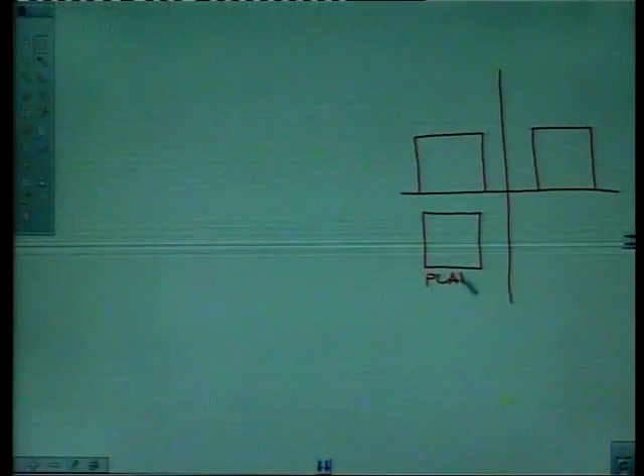First of all, we will draw orthographic of cube. Orthographic means plan, front elevation and side elevation. Before starting isometric, students must be familiar with what is plan. This is plan. This is elevation. And this is side elevation.

Okay. I am not going into detail. You must be aware of what is plan, what is front elevation and what is side elevation. So to draw isometrics, we must have at least plan, front elevation, or for complicated objects we must have a side elevation. So the isometric of the cube will be drawn like this. First of all, draw a straight line with parallel bar. This is horizontal line.

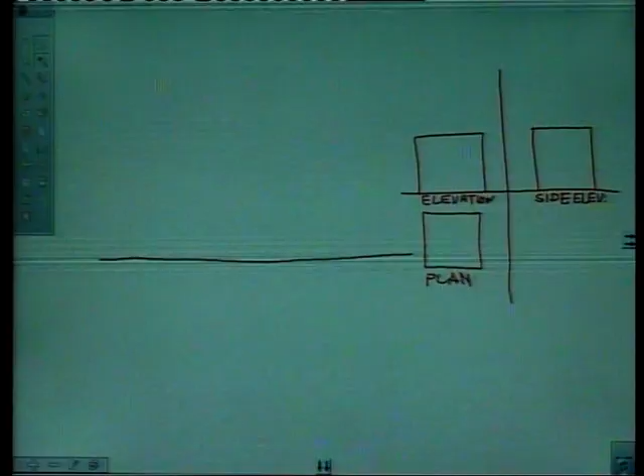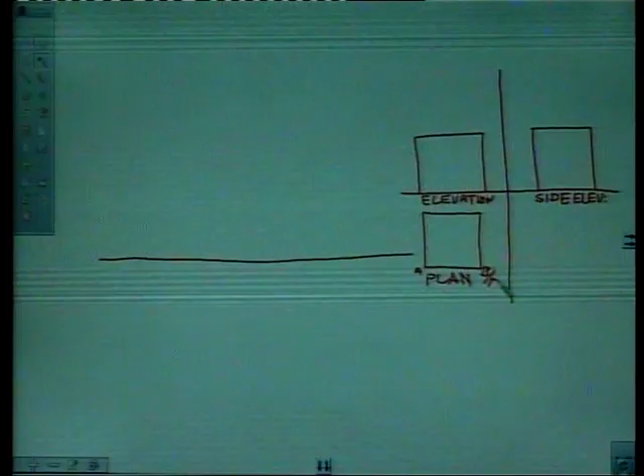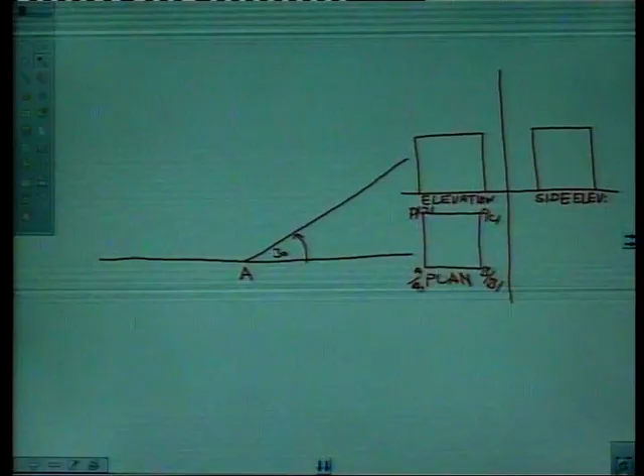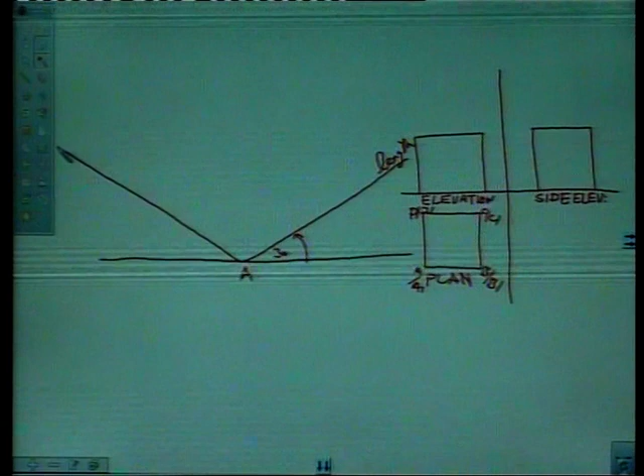Right? We will mark the points in the plan also, say A, B, C and D. Say we will start from point A, mark here point A. Right? Then draw a line at 30 degree like this. This angle is 30 degree for isometrics, and this line may be representing, say, length of object. Draw another line here. This is again 30 degree. This may represent breadth.

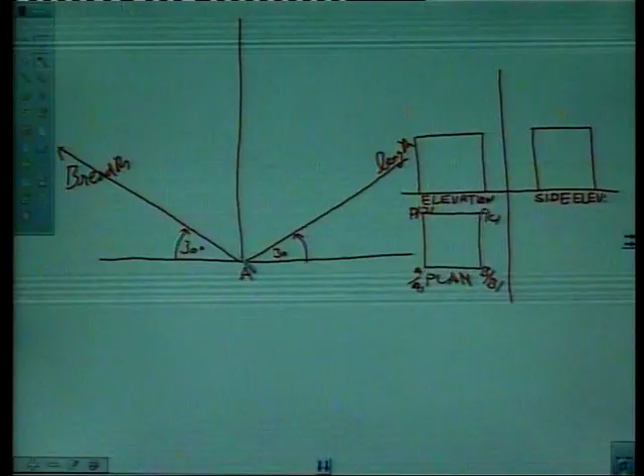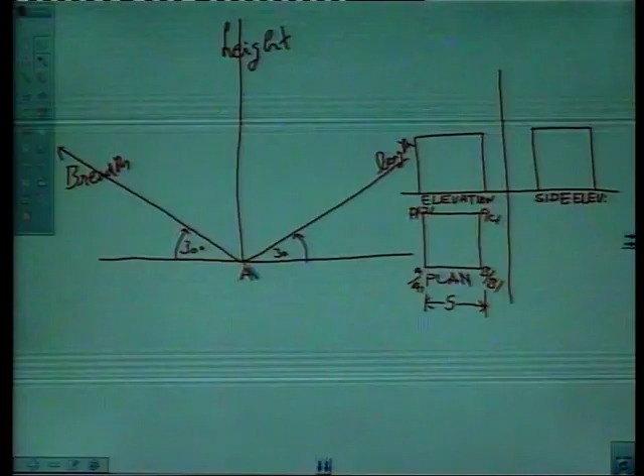Breadth of object, and draw a line perpendicular at point A like this. This may represent height of object. Right? So if we want to draw the isometric of a cube, say size of the cube is 5 centimeter. All sides are of 5 centimeter. So we will take from here and mark 5 centimeters, say 5 centimeters comes to here. This line represents length of the cube, which is 5. So mark a point here, A to B, and this distance is 5 centimeter.

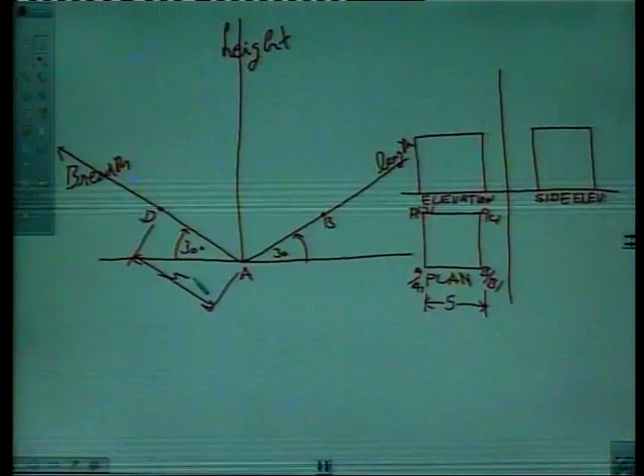Breadth of the cube will be again 5 centimeters, say from A to D. Mark breadth on breadth line. So this is again A to D, again 5 centimeter. Right. Similarly, height of the cube is also 5 centimeter. Say this is also 5 centimeter. Right. So mark height here. Right. Now we have length of the cube, breadth of the cube, and height of the cube, all marked on length, breadth and height lines.

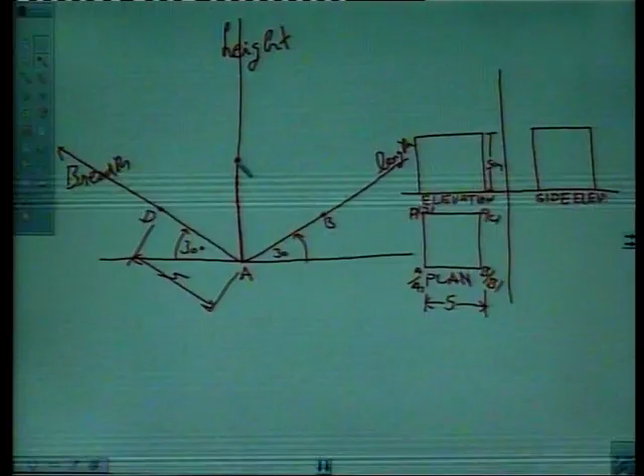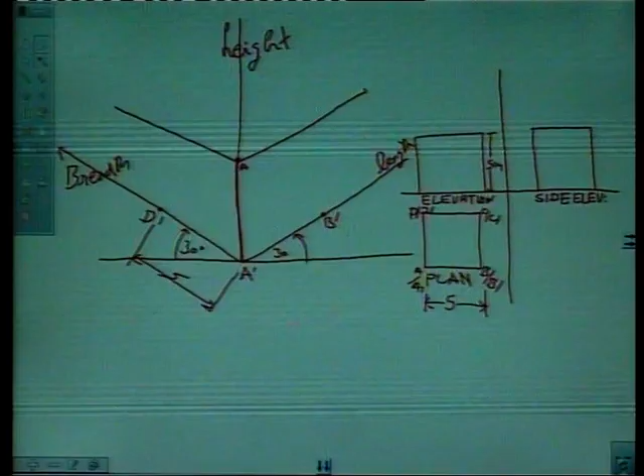Now how to complete the drawing? Okay, draw a line parallel to line AB from this point like this. This AB and this line are parallel. Similarly, draw a line like this, which is again parallel to AD line, right? So this height basically gives point A, and say lower point is A dash, so we'll write A dash, B dash and D dash. Now here we have A and A dash. From B, draw a line like this, straight. This line is basically perpendicular to this line. This B dash is perpendicular line, right?

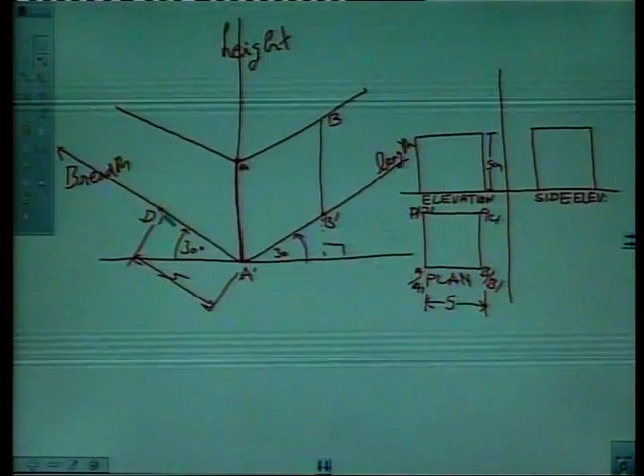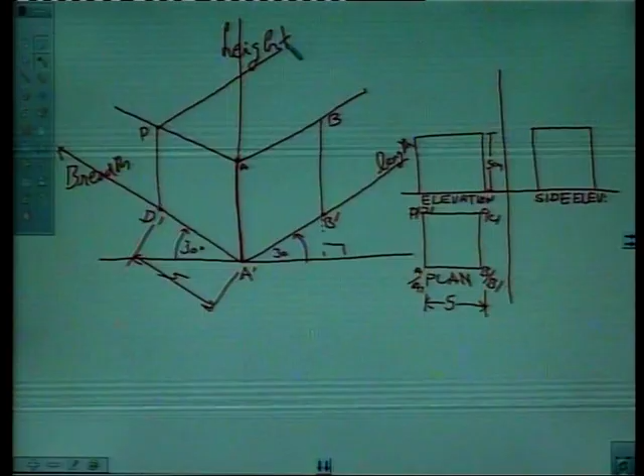From D also draw perpendicular or take a line straight vertically up. This will give us D, right? For locating point C, we will again draw a line parallel to AB like this, and draw a line parallel to line AD from point B like this. So we'll here get point C. So in this way we simply complete isometric drawing of a cube. We can draft this with dark pencil. Right. Object lines should be the darkest lines. So this way we get isometric drawing of a cube.

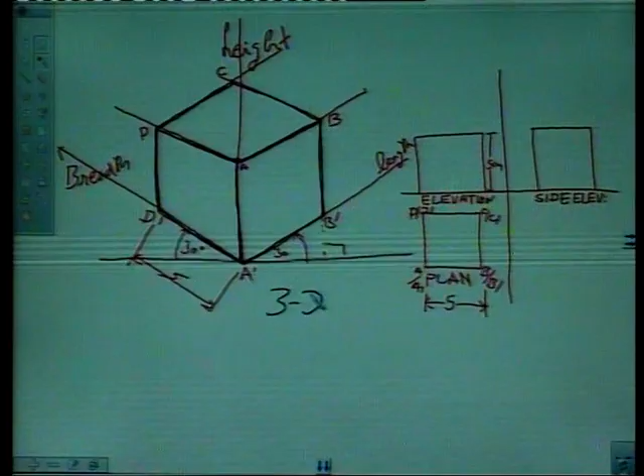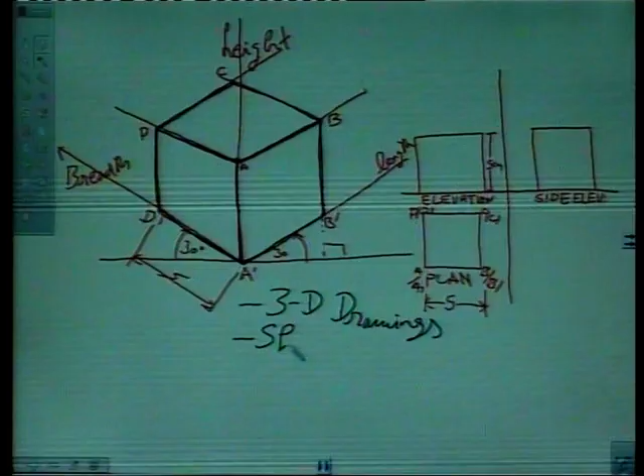So from this we can observe what are isometric drawings. Isometric drawings are basically 3D drawings. We can say these are 3D drawings. Next, this drawing shows us some components of the length of the object, some components of breadth of the object, and some components of height of objects. Shows components of length, breadth and height, right?

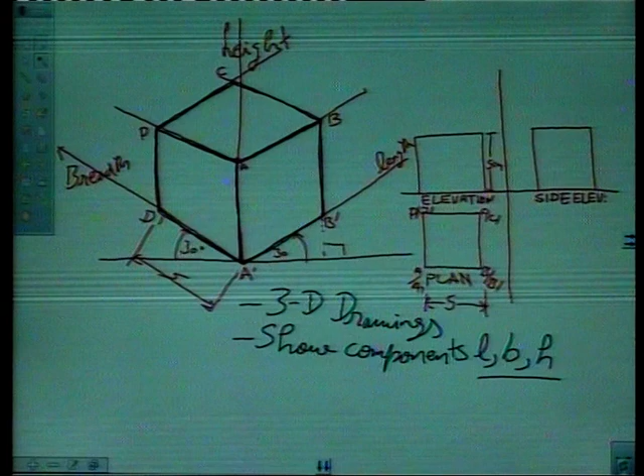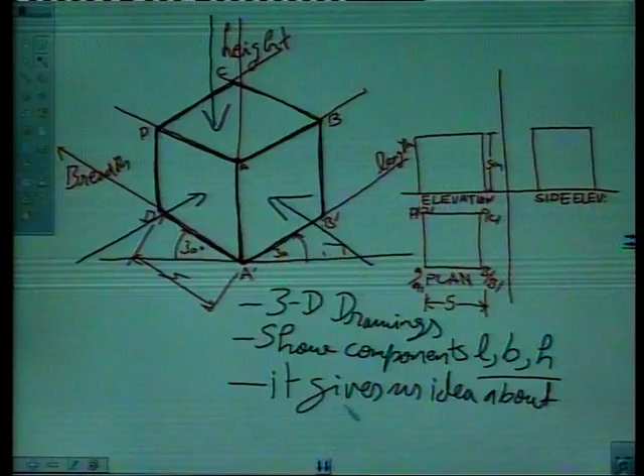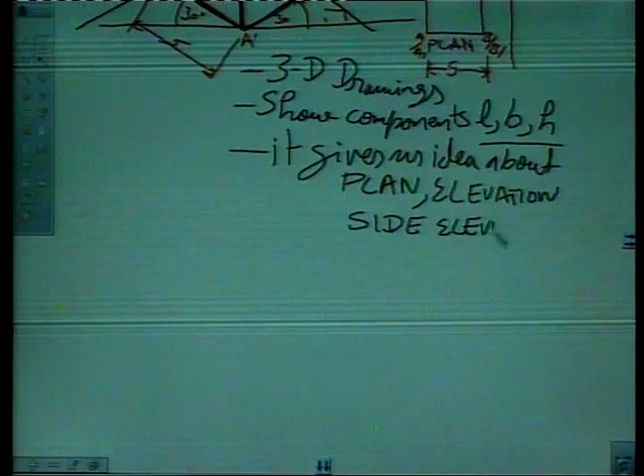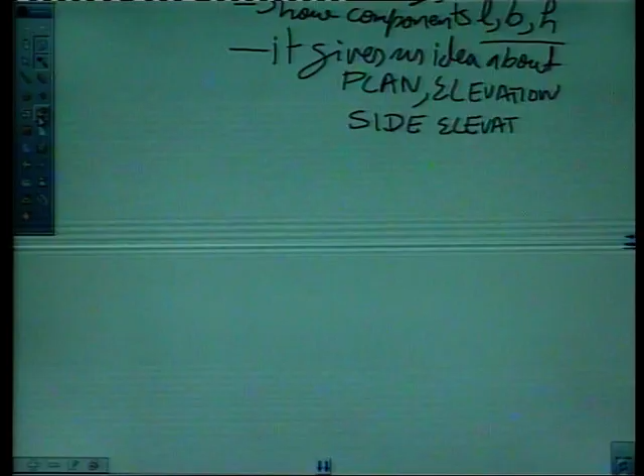Third, this isometric drawing gives us, say this is part of front elevation, this arrow represents front elevation, this arrow represents here idea of side elevation, and this arrow represents idea of a plan. So we can learn about plan, elevation and side elevation of the object. It gives us idea about front elevation, side elevation and plan of the object. All right.

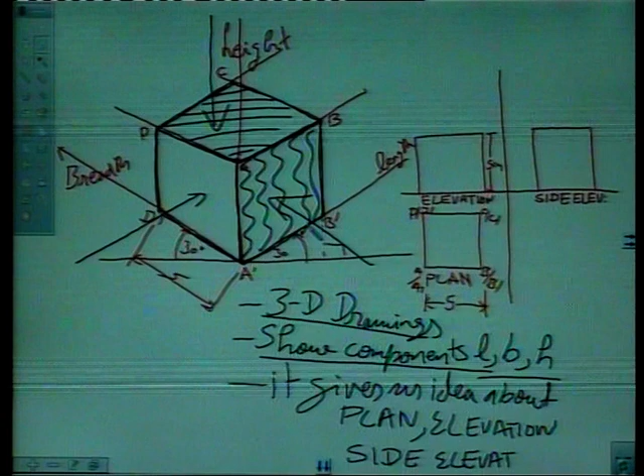So isometric drawings are basically 3D drawings. It shows some components of length, breadth and height. Right, this way we are seeing length, this way we are seeing breadth and height. It gives us idea about plan. This surface gives us some idea about the plan, right? And elevation, this here is elevation part, and side elevation, this arrow from this side represents side elevation.

So the students of architecture should be able to draw isometrics from these orthographic projections, or they should also be able to draw orthographic drawings from the given isometrics, right? There are some more things, like all lines which are parallel, like this AB and DC are parallel. In isometric also these lines are parallel. Say this is AB and this is DC.

This and this. We also observe in isometric that parallel lines remain parallel. This is also important. All parallel lines remain parallel. Like AB is parallel to DC here. This is parallel, right? And BC is parallel to AD. This BC is parallel to AD, right? All parallel lines remain parallel.

Next, all perpendicular lines remain perpendicular, like this AA dash. In actual, A and A dash is perpendicular. So this line is perpendicular here, right? And BB dash is also a perpendicular line. BB dash is also making a 90-degree angle with the ground. That means this is also at 90 degrees to ground. And DD dash is also at 90 degrees to ground.

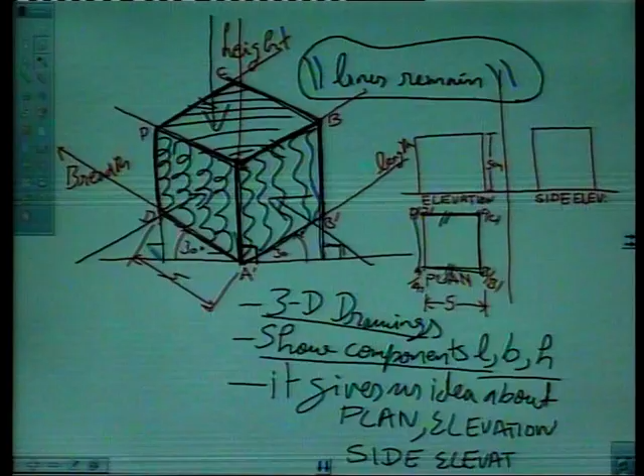That means all perpendicular lines remain perpendicular to the ground, and they can be drawn using parallel bar and set squares. We can keep our parallel bar here like this and set square like this. So this line is drawn by the vertical edge of the set square.

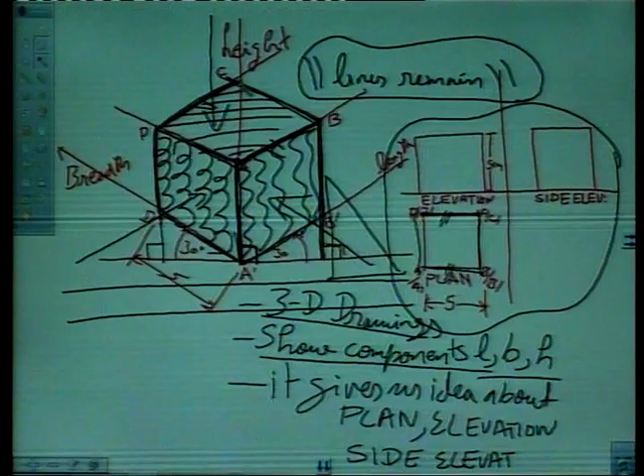So this gives us a brief introduction about isometrics. What are isometrics? These are actually 3D drawings and very easy to understand by a layman. A layman can't understand this drawing. This is an orthographic drawing. Only technical persons like engineers and architects can understand this, right? And this can be understood by everybody. Everybody can say that this is a cube, right?

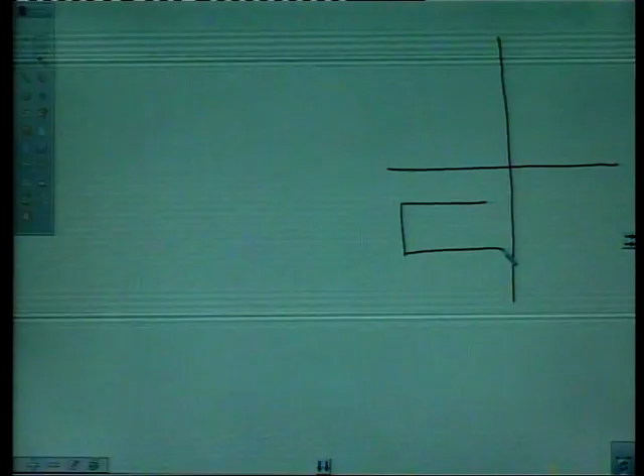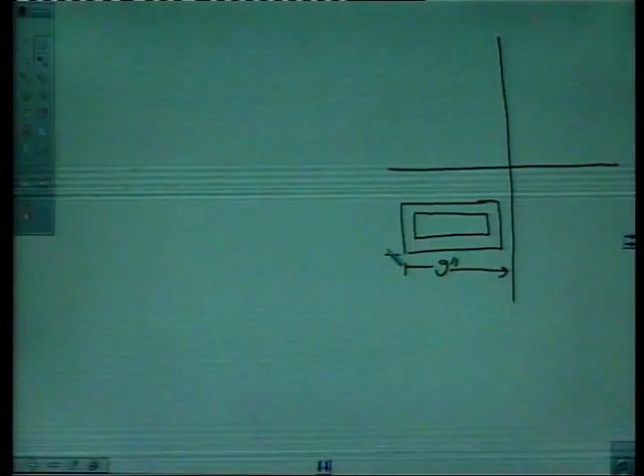Now let's take one more example, very familiar. Say we want to draw the isometric of a brick. For drawing the isometric of a brick, first we should know the orthographic of the brick, or plan, elevation and side elevation of the brick, which I will draw very quickly. Say this is the plan of a standard brick. Say this line represents the frog. Say this is 9 inches. Say this is 4.5 inches.

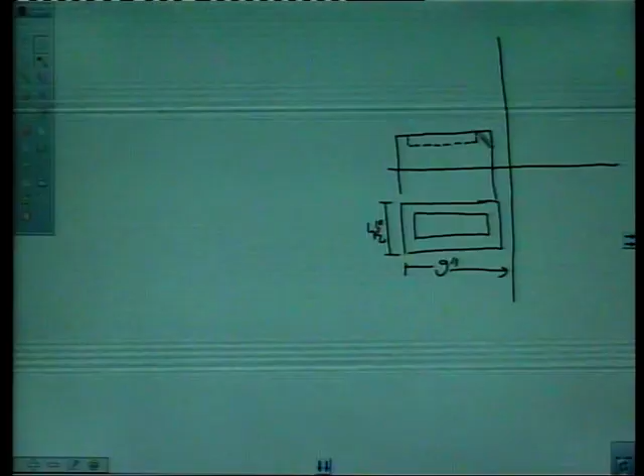Right? In elevation I will draw quickly, as you all know what are plan, elevation and side elevation. Guidelines. The frog will be dotted in elevation, right? And in side elevation also, like this, 45 degrees. I am not going into detail how to draw orthographic. You all know how to draw it, right? Say the height of the brick is 3 inches, standard brick.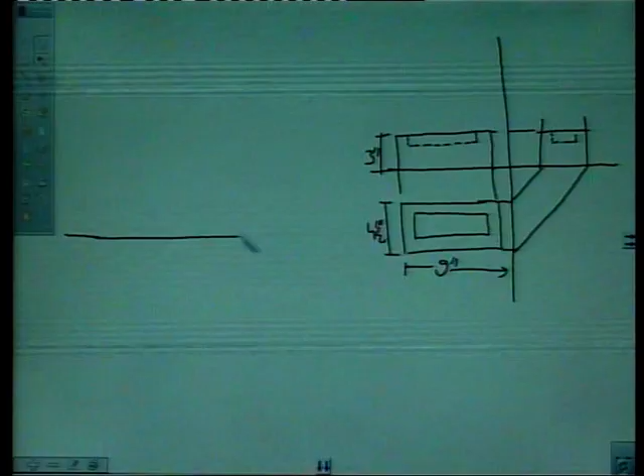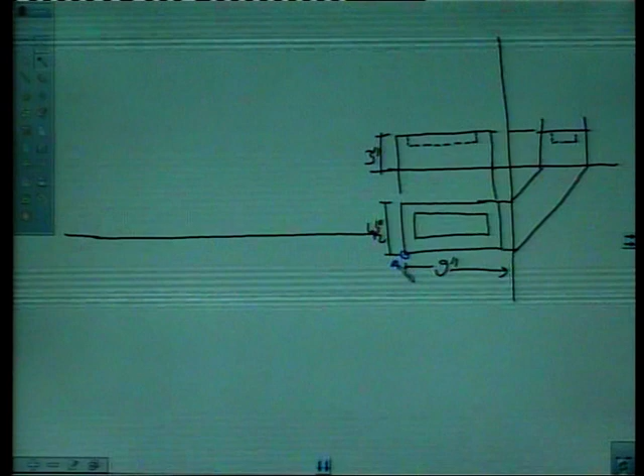Now how to draw its isometric, again step by step. The first step is draw a straight line. Start drawing in guidelines only. Say blue color represents guidelines, right? Say we start from this corner. Name this corner. Say this is again A. This corner is B, this is C and this is D, right? Say we start from here and this point is A.

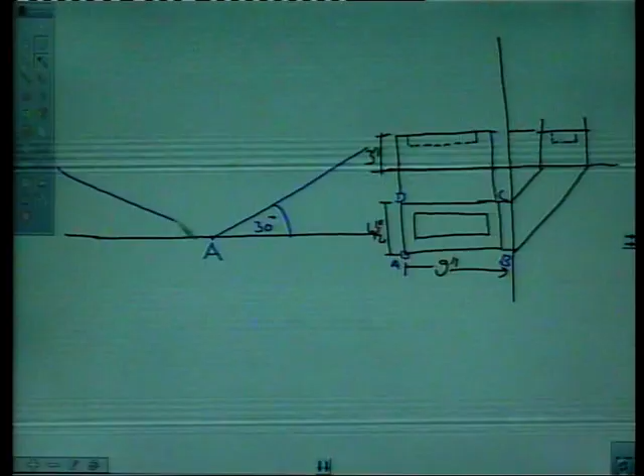Start by drawing 30-degree angles on both sides, like one angle here, 30 degrees. Second angle towards the left hand side, this is also 30 degrees. And one vertical line, right? This will represent length, this will represent breadth, and this will represent height of the object. So, first we want to represent the length of the brick. Length is 9 inches. From A, mark 9 inches here. So this point will become B.

Now, mark the point D, where AD represents the width of the brick on the breadth line. Say this is 4.5 inches, right? Now, we have point B and point D here, right? We can mark the height of the brick on the vertical line, the height line, which is 3. Say this is the total height of the brick, which is 3 inches.

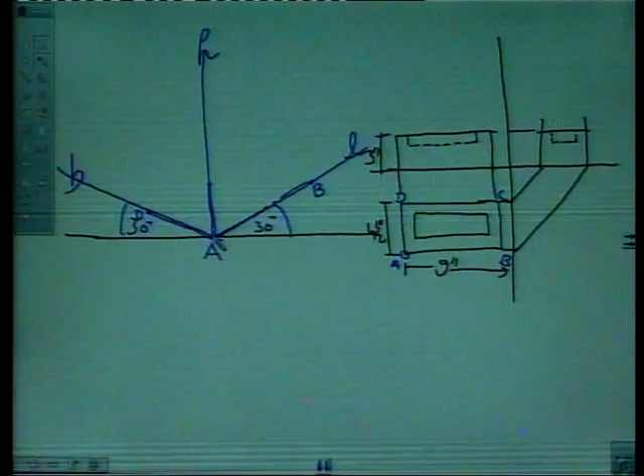Now, as we know, parallel lines remain parallel in isometrics. So, this line AB is parallel to DC, and AD is parallel to BC. So, we can draw a line parallel from the height of the brick like this. This line is parallel to line AB. AB is an edge of the base, and this line is an edge of the top of the brick, right? Both base and top edges of the brick are parallel, so we can draw a parallel line here. Similarly, for this height.

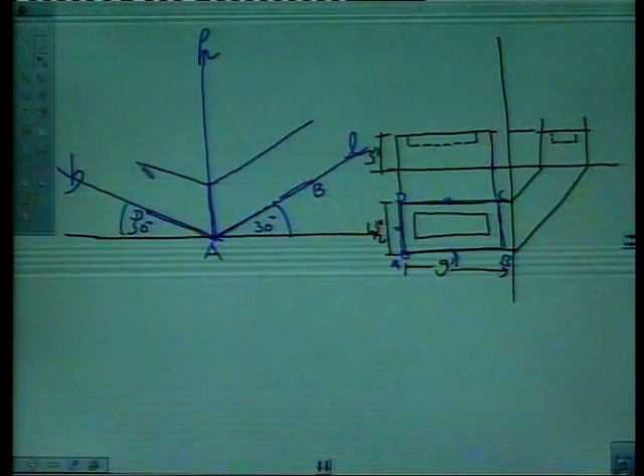Now, draw a vertical line with the help of T square and set square like this. This line is drawn vertically with the help of T square and set square, which is actually making 90 degrees with this line. This line is vertical, so it will remain vertical. Similarly, from D, draw a vertical line like this with the help of T square and set square. It will intersect this line here and this line here.

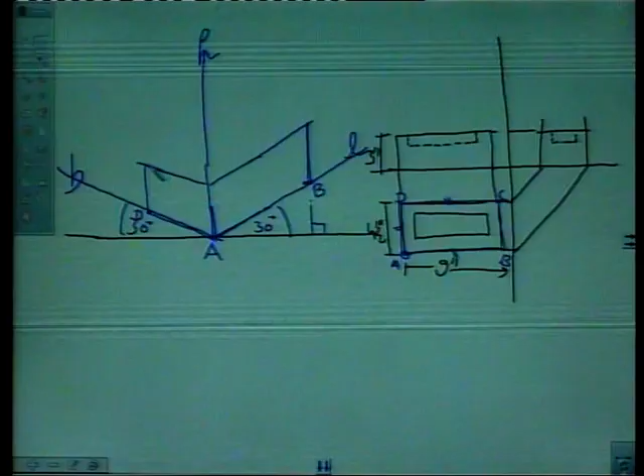Then, top edges of this plan AB and DC will be parallel, so we can draw a parallel line from here also, like this, and one parallel line from this point parallel to this line like this, right? This way we complete the isometric drawing of the brick. So, this is 9 inches, this represents length, this represents breadth, and this represents the top of the brick.

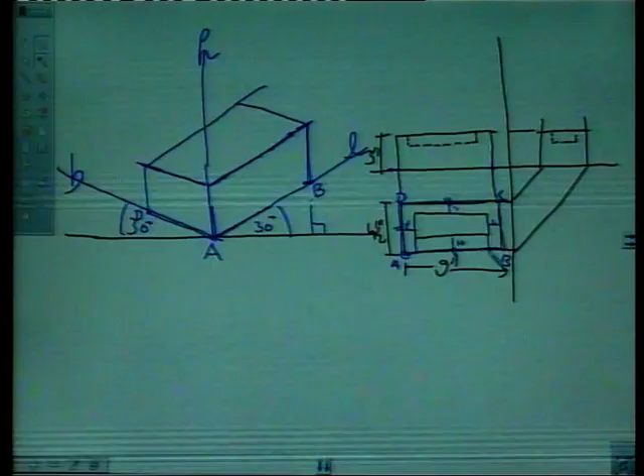So, how to draw the frog? Say this is 1 inch from all sides, and the rest is the frog part, which is the depressed part. How to draw this? Just from here mark 1 inch, and from here mark 1 inch, right? Actually, we have marked this point. On line AB, we have marked this point 1 inch, and this is 1 inch.

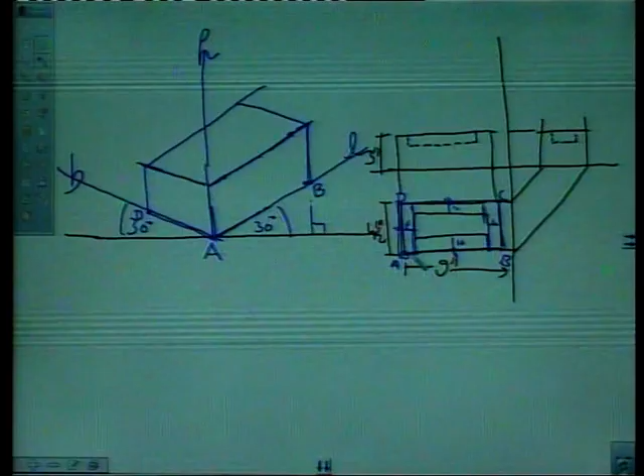Again, these are parallel lines, right? So, for the frog, this edge is parallel to line AD, and this is also parallel to line AD. So, we can draw a parallel line like this, right? For drawing these lines, this and this, basically these lines of the frog are parallel to line AB. So, these can be drawn again parallel from here.

Mark 1 inch here also. If this is also 1 inch, mark 1 inch here, and from here 1 inch, and draw parallel lines like this, right? So this will give us top of the frog. And how to mark depth of the frog? Say depth is half inch.

So as per statement from isometrics, vertical lines remain vertical. So depth will be visible only from this corner like this. Draw a vertical line downward. This line is also perpendicular to the ground, and mark say half inch here and draw a parallel line like this, right? This represents depth of the frog. So this way we have completed our isometric drawing of brick, right?

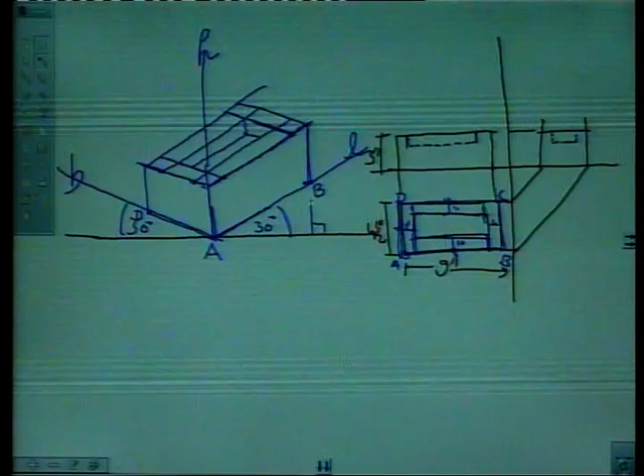Now draft it. For drafting we will use dark black pencil, right? Draft all the edges. First we will mark this with dark pencil, then we will dark this edge, then we can dark this edge also, we can dark this, all object edges, right? These all lines are actually parallel in object, and in isometrics also these lines are parallel. 1, 2, 3, 4, 5. All these lines are parallel in actual, and in isometrics also they are parallel, right?

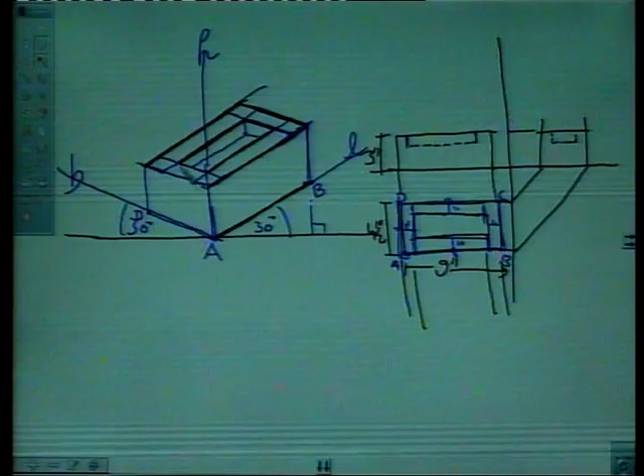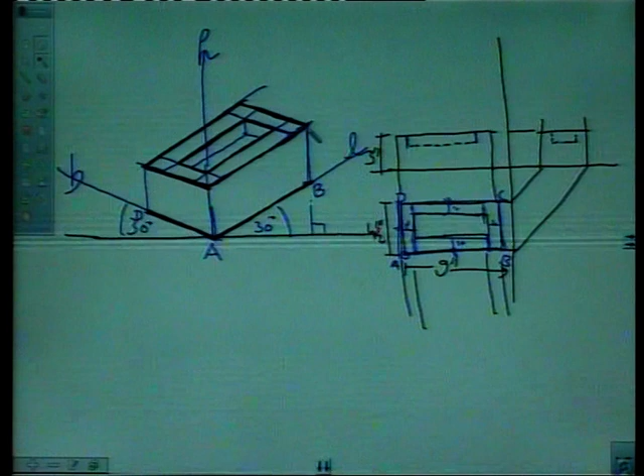And second set of lines is all lines like this, right? All lines parallel to this edge. First say this edge dark, then this part of frog, then this, and this, and this. 1, 2, 3, 4, 5. All these lines are parallel to each other, right? Now rest of the lines are vertical lines which can be drawn with the help of parallel bar and set square like this. Use some good dark pencil for this, right?

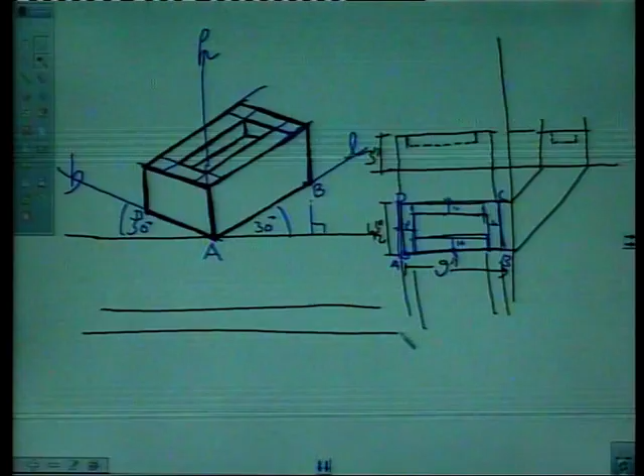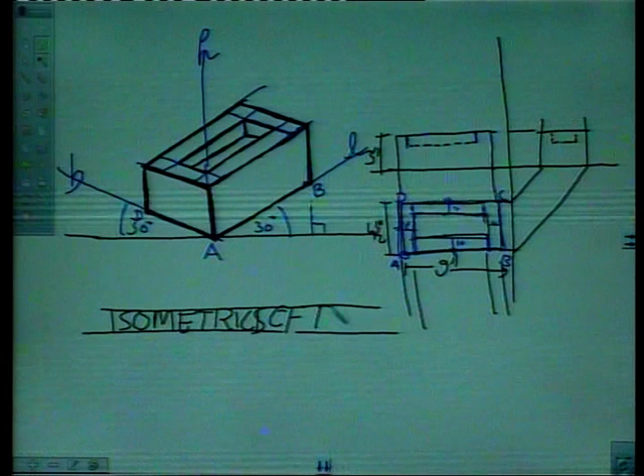And for frog part also we can draw this line with the help of set square and T square, right? And this line again parallel to this line like this. So this way we complete isometric drawing of a given brick. We can write here, always give heading: isometrics of brick, right? We can dimension also.

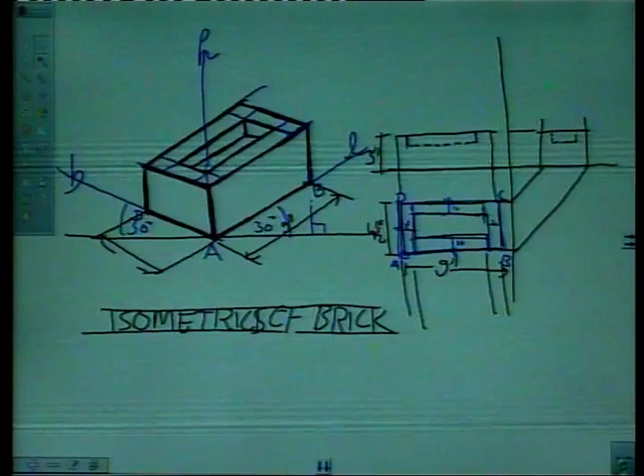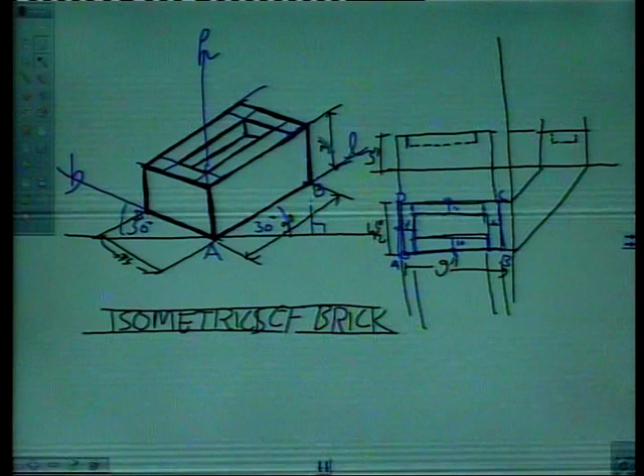For dimensioning, draw line like this, and this edge like this, and draw arrows here, right? And write here say 9 inches. For breadth, extend this line like this, right? We can write here say 4.5 inches, right? For height, extend this line like this, and we can write here say 3 inches. See? This way we complete isometric drawing of a brick.

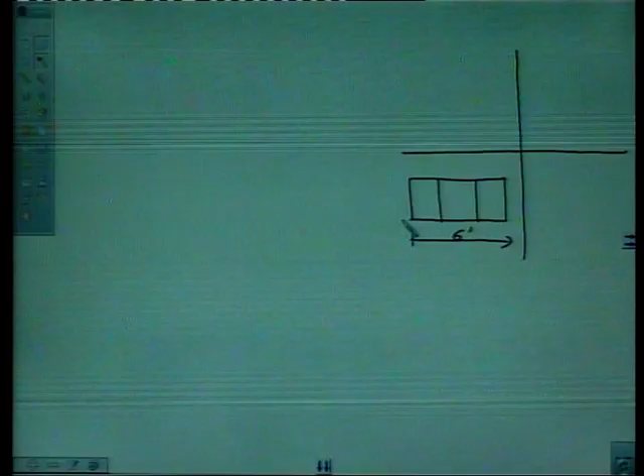So let's take one more example, little complicated than this. So let's draw isometric drawing of a victory stand, right? First imagine the dimensions of the victory stand. Say in plan, we have like this, say this total is 6 feet and this here is 2 feet, right. This is first position, say this is second position and this is third position, and in elevation we will see like this.

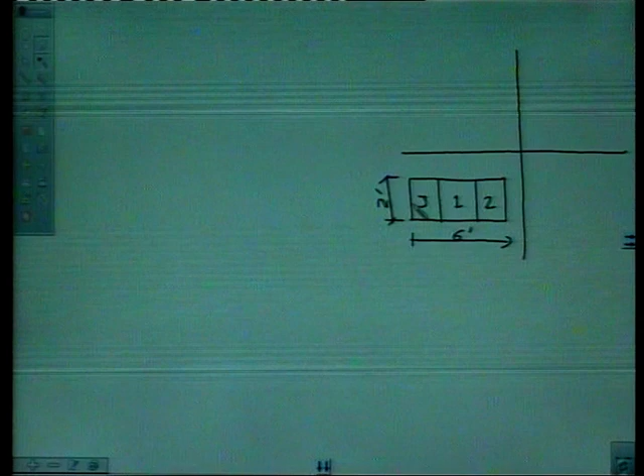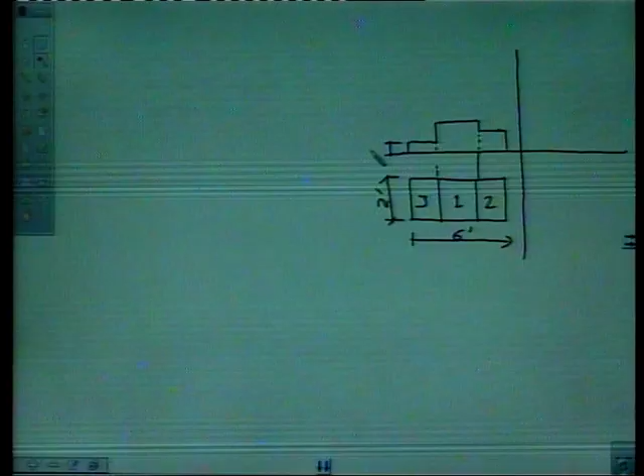Right. Say we have this 6 inches, this height is 1 feet, 12 inches, and total height is say 1 feet 6 inches, right. This is orthographic drawing of a victory stand, and we can draw side elevation also. I will draw quickly as we already know how to draw this. Right. From this we have drawn front elevation, and side elevation is from this side and plan is from top.

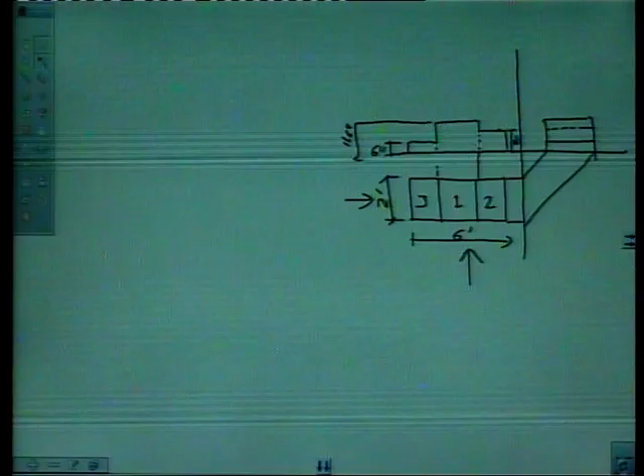How to draw its isometric? Again, first step is understand this, or we can draw even rough 3D sketch of this also. Say I draw quickly rough 3D sketch. Victory stand is something like this. So this is rough sketch. You should be able to draw rough sketch also. This will help you to draw isometric. Right. How to draw isometric systematically? First start with guidelines. Say blue lines represent guidelines. I will draw a horizontal line like this. Right.

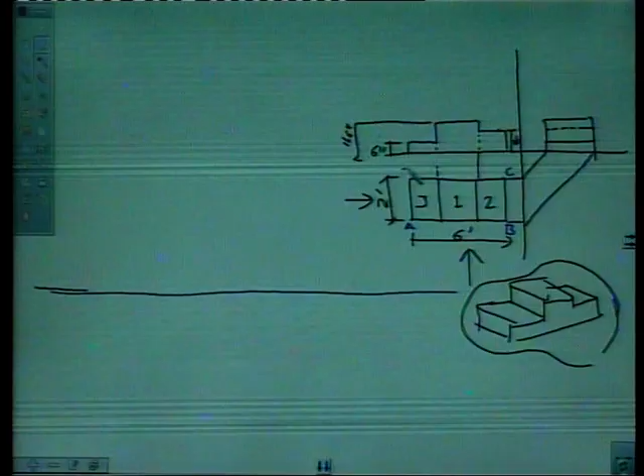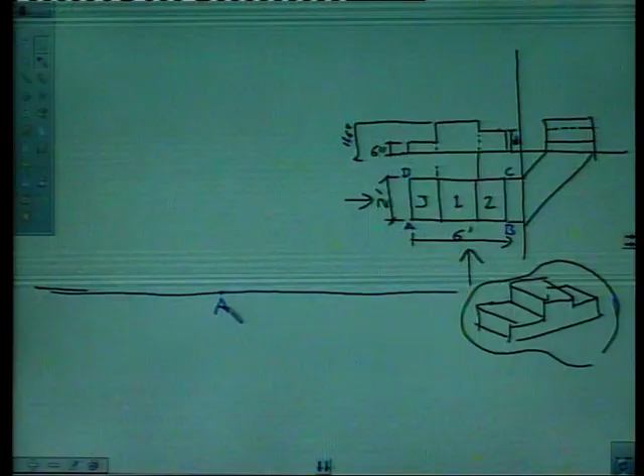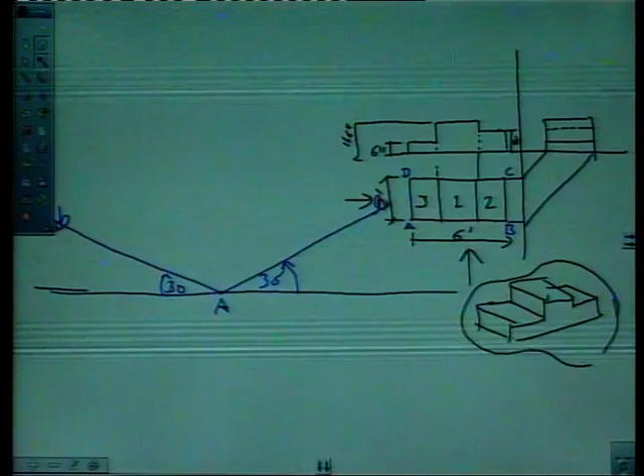On this I can take, say this is my point A, this is my point B, this is my point C and this is my point D. That means ABCD represents the extreme edges of the victory stand, right. Say I start from point A. First of all I will draw line for marking lengths of the object at 30 degree; this angle is 30 degree. Similarly for marking breadth, I will draw next line which is again at 30 degree. For drawing heights, I will draw a vertical line from point A like this. This line will represent height of the object, right.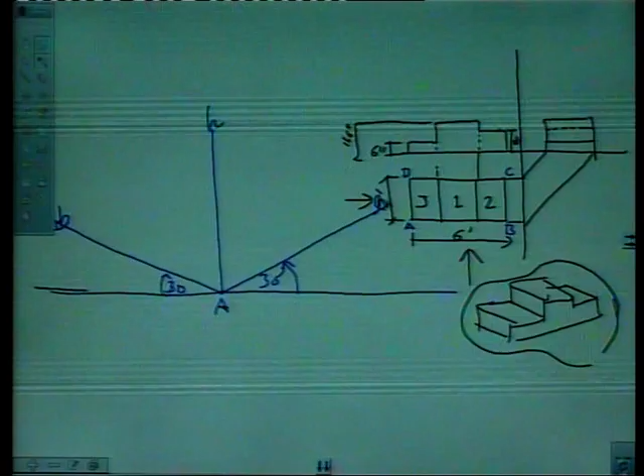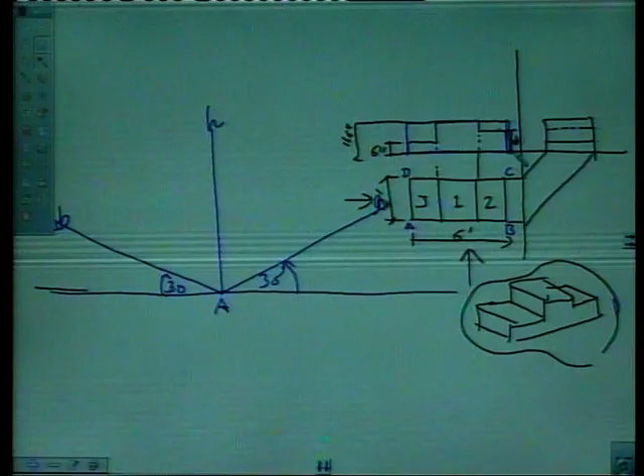How to start drawing isometrics? There are many ways. One best way is, first imagine this as a cuboid, right. Clear? We can imagine this victory stand like this, right. Enclose this victory stand in a cuboid. First we will draw cuboid. So size of the cuboid will become length 6 feet; mark 6 feet to the scale, right. Say we are using 1 inch scale, 1 inch is equal to 1 feet. So mark 6 inch here, right.

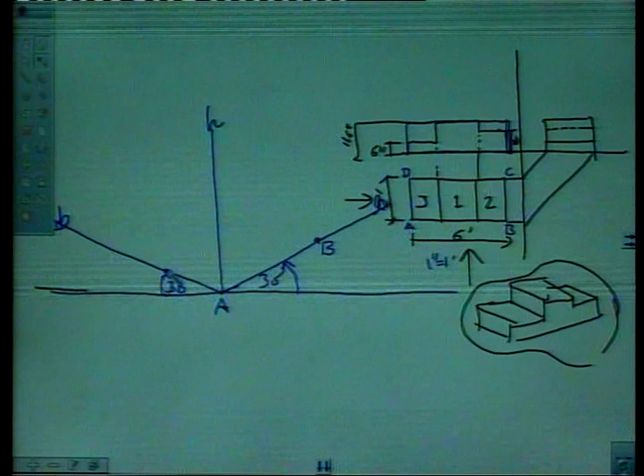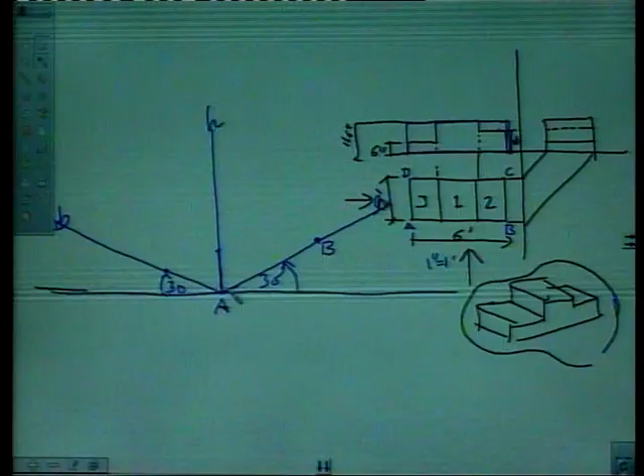Then this will represent point B, maximum length of the victory stand. Width of the victory stand is say 2 feet, mark 2 feet here as per scale, right. And height is 1 feet 6 inches. So mark 1 feet 6 inches to the scale here, right. We have 3 edges of the cuboid. From these 3 edges, we can quickly complete the box: parallel line, parallel line, vertical line, right? Again parallel